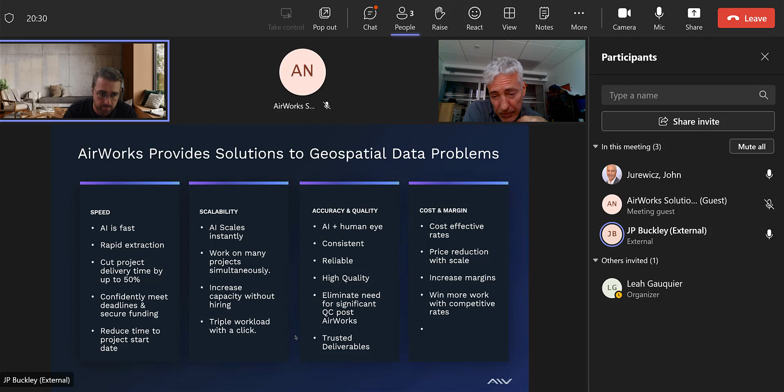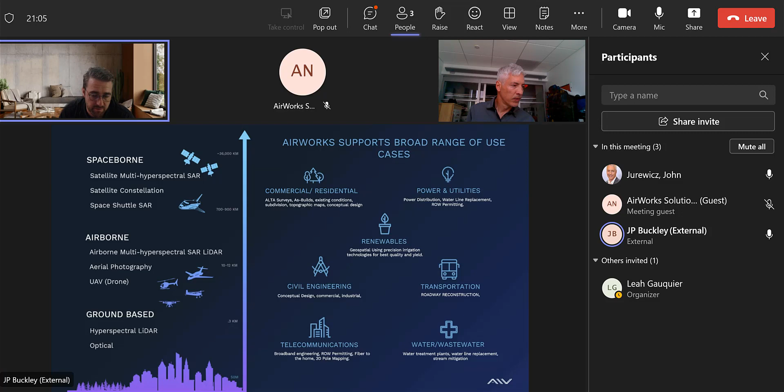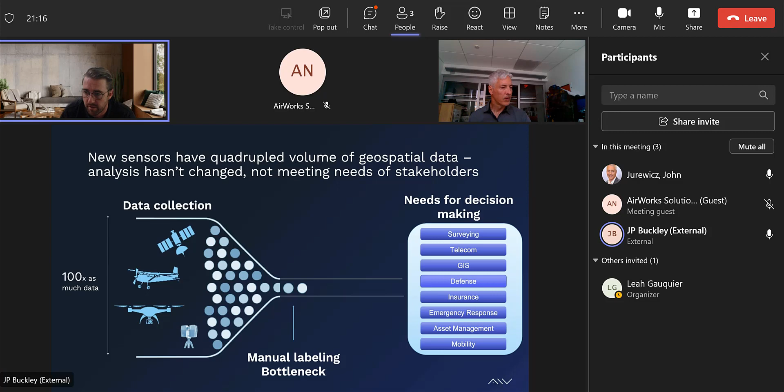Okay, so you're generally tied in. The problem we're trying to solve, it seems like you're on point with it, but there's just so much data now coming in. Every different industry is using it. Everybody wants to gain insights from geospatial data, which is good for us and good for the Wade Trims of the world, but it's leading to this gigantic bottleneck of information, which is leading to people turning down work, not using the technology as much as they should, and just in general longer turnaround times, higher costs.

It's not good. So what we try and do with AirWorks is get implemented into their internal workflows, inject some automation into that, automate the mundane portion of it, and really start to increase capacity, free up internal resources, and reduce turnaround times on a lot of the projects.

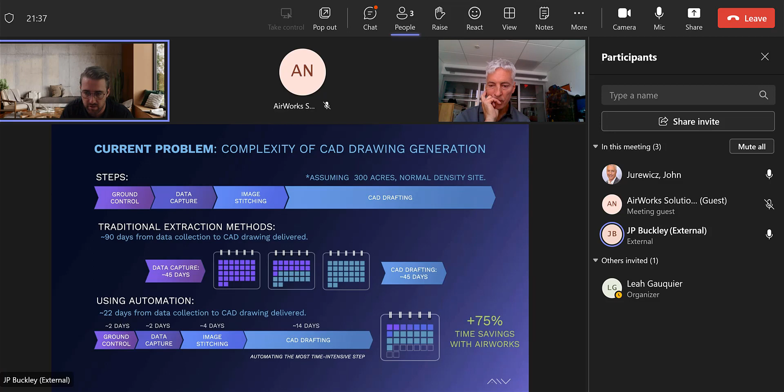So this is a pretty standard urban, more brownfield type project - maybe different from what you're talking about, but you did just mention parking lot, so maybe the same. A typical CAD technician or GIS technician who has to digitize by hand, a project like this is going to consume about 40 hours of their workload total. With AirWorks integrated and us being able to automate 60 to 90% of the features they're extracting off their plate, we can really reduce their whole manual effort on a project down to about a half hour, an hour, just with some cleanup.

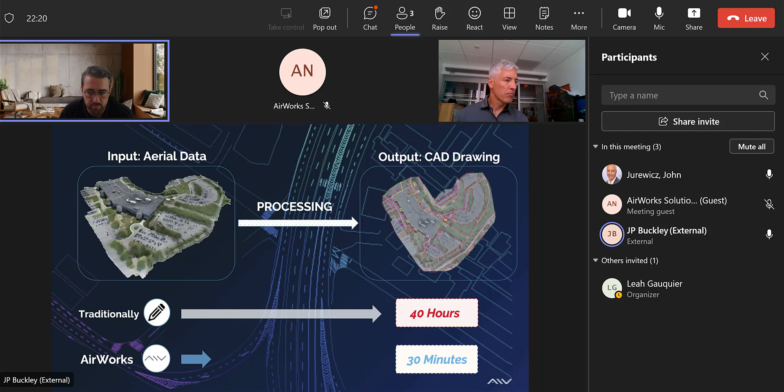And so it can shift the whole way these organizations are doing work on the office side, production side, and really increase their capacity. Here's our team.

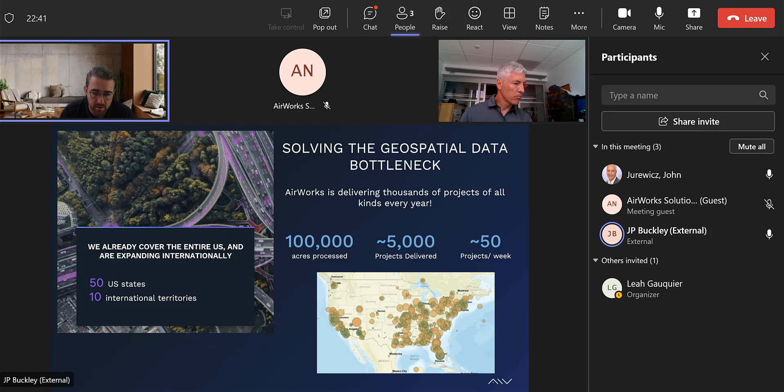We did some research already, so I won't dive in too much on that, but it's a pretty strong team of technical and industry experience processing a lot of projects. This is just on our civil side, not even touching the work we're doing in telecom or government. We're doing 50 to 100 projects a week all across the country. So we know what we're doing - we've been working with this stuff.

We're working with a lot of the top civil engineering firms. We like to work with firms like the Wade Trims of the world who are already using this type of data. They know when to use it, they know when not to use it. They have structures built out, but they're at this point where it's like, okay, we're just collecting too much data now, and we can't scale at the same pace with our office staff, and we also might not want to go overseas to India because of the quality and just managerial efforts on that front.

So you probably recognize Kimley Horn up here, a lot of work with some of the top. Our initial champion was out of the West Coast. We were working with Bobby Valentine. He was on their kind of innovation technologies, really building out their drone program, and we were doing a lot of the project work out west on transportation stuff. Bobby's no longer there, so we're working with a gentleman named Chris Rose. And then we've got relationships with David Garrigus, who's out of Raleigh, and some of the work that they're doing, just more from an enterprise-wide type of relationship.

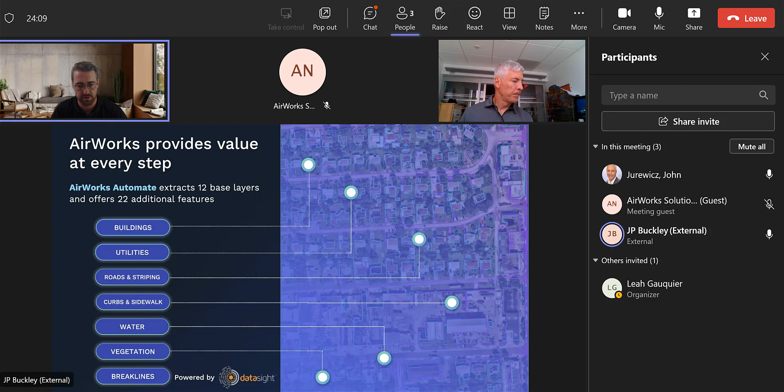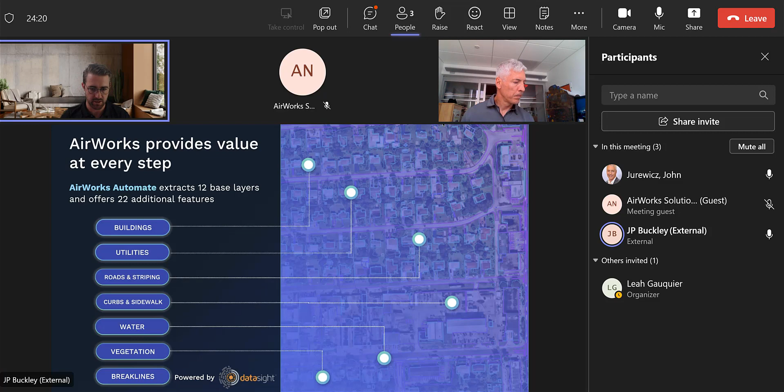The way that we work is we digitize a core number of features using our AI, and then we also offer more of a services base to do additional features outside of that, depending on your use case. Buildings, manholes, drains, edge of pavement, paint line stripings, curb, sidewalk, water, vegetation are all part of our core, concrete pads as well. And then we can also offer some break line solutions more on the design side.

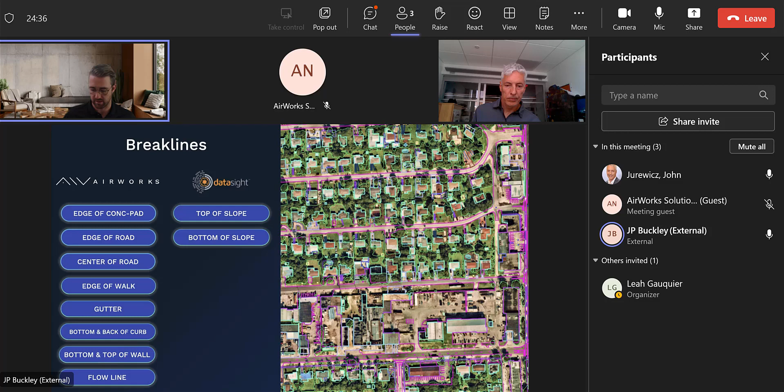If you're working with Nearmap, then we're just interested in 2D planometrics, but you can also get some more design-level break line solutions. This is less automated. The datasight ones are fully automated, but that's a basic top and toe slope, more in these gigantic open fields. When you start getting into more urban environments for design, we'll do a much more robust sort of break line, which is more manual, but a service that we offer.

And then before I jump into some projects that we're actually working on, where does Airworks fit in? I think the early stages of a project with site planning, conceptual design, feasibility, site logistics from like a Nearmap or a manned aircraft, more mapping grade stuff, we definitely do a ton of this work. Permitting is the other big one that we're doing for the telecom and some of the power utilities sectors, just helping generate basic base maps, not survey grade, helping speed along that process.

And then we also do a lot of detailed design work. So we're talking from LiDAR for surveyors, down to that tenth of a foot accuracy type deliverable. Then we do a lot of ALTA surveys and stuff, handovers for post as-builts for post-construction. We don't do a lot in construction. We're not doing volumetrics and stockpile calculations. There's plenty like Propeller can do that perfectly fine, that's not really our bread and butter. And we're not doing a lot of change detection type progress monitoring, that's really not our sweet spot. We're more on the planning and then the design side, pre and post construction stuff.

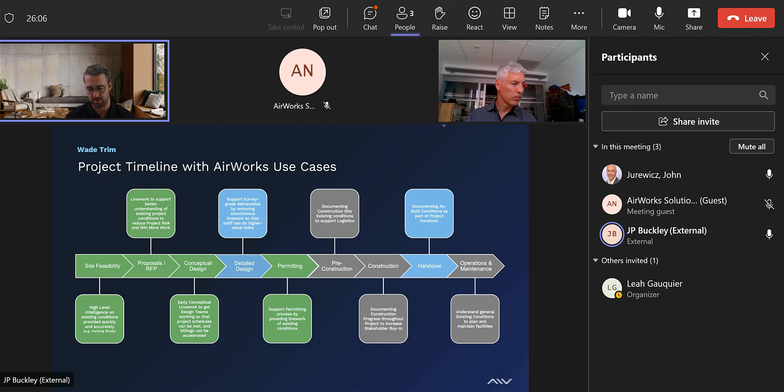All right, so I'm just going to run through a couple different types of projects and talk a little bit about the value that was derived from them. So this is a typical type of project we do for surveyors. This was going to get turned into a subdivision. They're just looking for a grading topographic map. They flew it with a drone with a LiDAR. There's software out there that can process rough and dirty topos pretty well and pretty quick, like all the LiDAR sensors out there, as I'm sure you know. So we don't particularly compete a ton in this space on speed or cost, but we can, because we have extra layers of QC, like our classified point clouds are really, really accurate.

With this particular client, they just had so much work coming in. It wasn't a matter of whether they could do it faster or cheaper in-house. They didn't want to turn down work, so they threw some stuff to us.

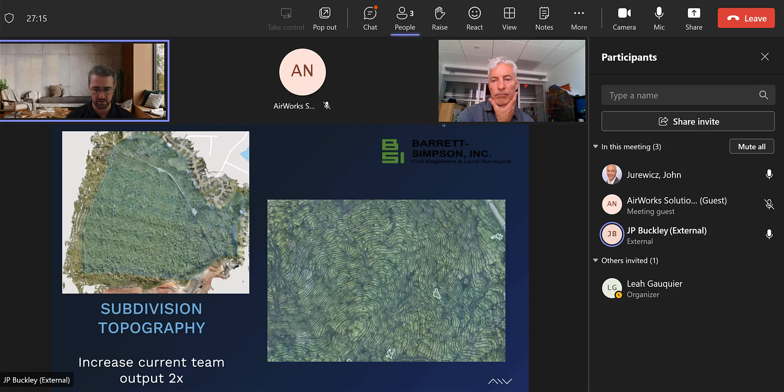We help increase their capacity on some of these jobs. We do some open field, green field type contour work too, not a lot of infrastructure on it, but that's probably not our bread and butter. This type of project is more in our wheelhouse, something we know we can deliver value on. Tons of ALTA surveys, urban environments, a lot of features to be extracted. This was from a drone, but the same concept applies to Nearmap or other lower res imagery.

We've done some industrial projects, but we don't work directly with any automotive companies. There's some like Kimley-Horn, and we were talking with Jacobs about some stuff with HD mapping for some of their self-driving car work.

With this particular project and many similar ones, these turnaround times and value adds are pretty standard. Relative to their in-house team, we eliminated 65% of the drafting time from their plate, freed up those resources to work on higher value tasks, and we did it for 25% of their in-house cost. So those are some good benefits.

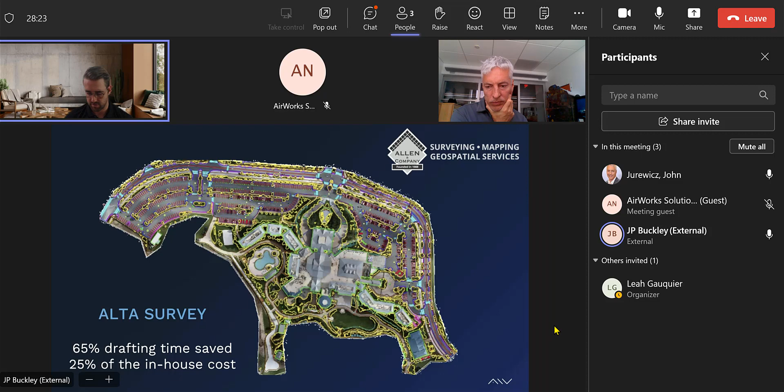We do a lot of wastewater work, whether it's treatment plants like this or long right-of-way corridor type water line replacement projects. We delivered a 78% cost savings to them and freed up this technician 16 hours to work on other stuff.

Our accuracy in the horizontal is where we guarantee no more than 2 pixels off. How geospatially accurate that is depends on how big the pixels are that we get. We're very much data in, data out, garbage in, garbage out, but our guarantee is 2 pixels.

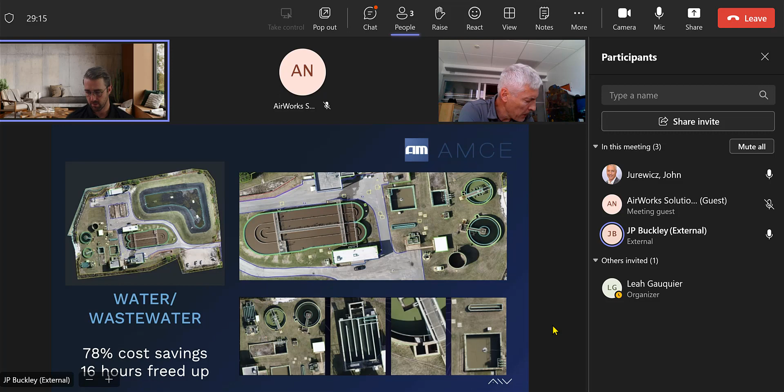Yep, this is a use case we're doing. I don't know, do you guys do anything in the telecom, fiber, broadband world?

That works, we do a lot of that. We're doing a lot of Amazon facilities and things like that as well, which is good. So maybe this isn't in your wheelhouse, probably not, but just so you get a sense of the scale we can operate at.

The fiber telecom broadband world is insane with the amount of money flowing from the government to build rural fiber. We're working with a company, a couple different companies now. This project was 800 miles, and we were working on about three of them at the same time for them.

They drive this with a mobile LiDAR unit. We rasterize it into an ortho mosaic, run it through our system, and then we're also helping with some pole line sag, mid-span, and pole calculation stuff. This really hints at the scalability of it.

They got all this money to do all this work but couldn't really deliver on it. They were doing one project at a time with a huge backlog. We said, listen, send us all the data at the same time and we'll run it through our system. We've really helped revolutionize it because they're doing a ton of work.

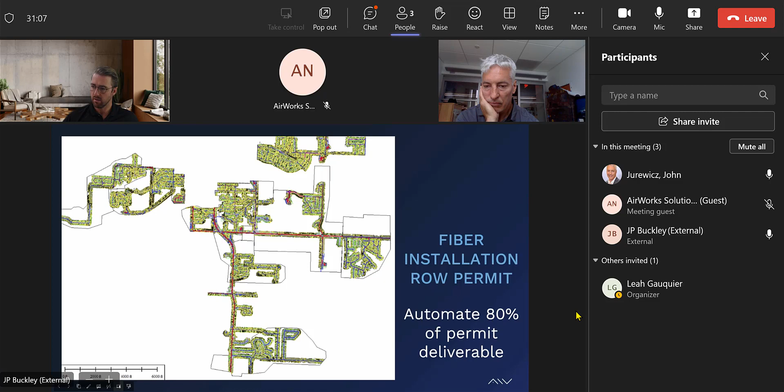This is a Nearmap use case, working with MasTec Power Utility. They're burying a bunch of electric lines in Florida for some hurricane and climate change prep type stuff.

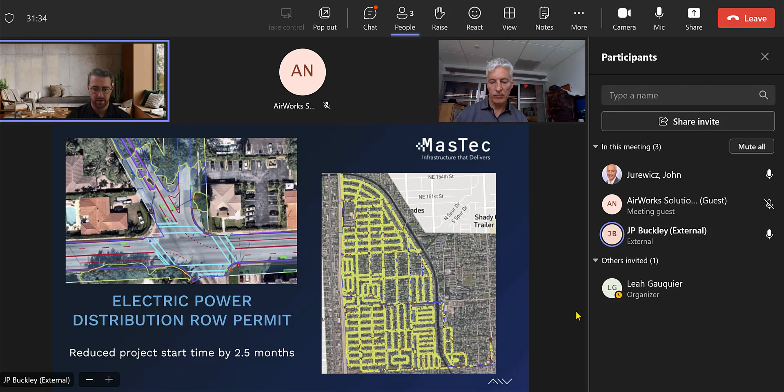Their workflow before for generating permits was they had guys in the field, and then they had a whole office production staff trying to pull the existing GIS from an Esri system or working with municipalities to get whatever they had, and then they would...